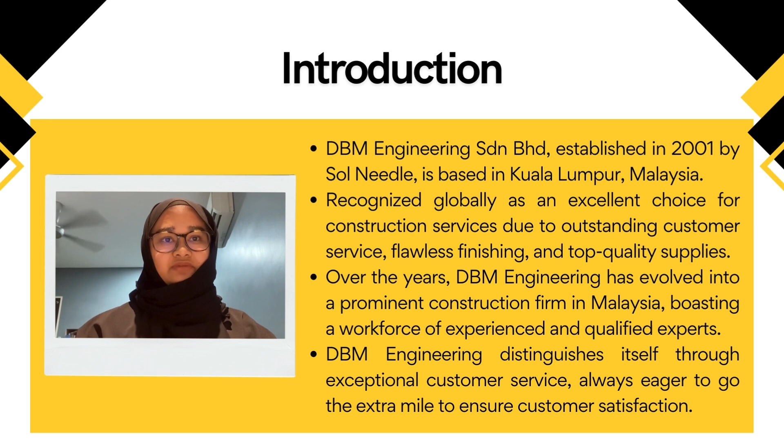It is recognized globally as an excellent choice for construction services due to outstanding customer service, flawless finishing, and top quality supplies. Over the years, DBM Engineering has evolved into a prominent construction firm in Malaysia, boasting a workforce of experienced and qualified experts. DBM Engineering distinguishes itself through exceptional customer service, and they are always eager to go the extra mile to ensure customer satisfaction.

Assalamualaikum. Let's talk about the purpose and importance of company Hirarc. The purpose is first and foremost to prioritize occupational safety and health in the company.

Therefore, accidents or injury prone situations could be avoided. Next, to ensure the company and workers are aware of the guidelines of occupational safety and health in the company. Lastly, to ensure the environment at the workplace is safe and organized.

The importance of this purpose is firstly to identify all detailed risky hazards at the workplace that could harm others. Secondly, to consider the chance of one facing the circumstance of any case, and the possibilities that could occur from the risk.

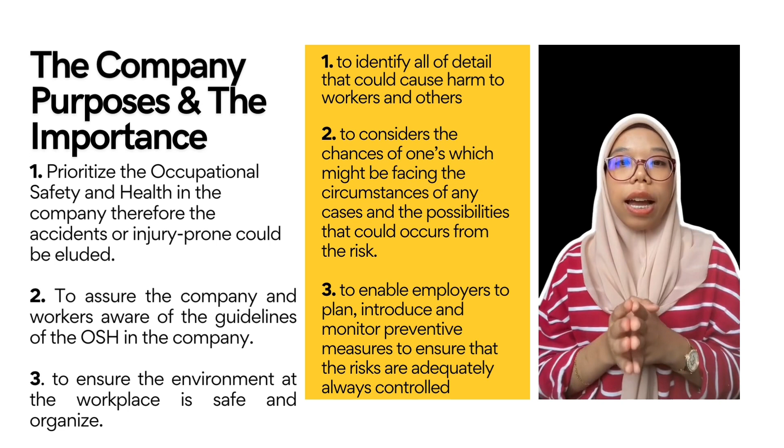Moreover, it is to enable employers to plan, introduce and monitor preventive measures to ensure the risks are adequately controlled. Assessment is conducted by Mr. Arif and his colleagues.

Regarding the construction field, this relates to Sungai Besi-Ulu Kelang Elevated Expressway, SUKE. He complies with every safety and health officer's assignment, which is to run the responsibility by listing down the planning and conduct for certain situations.

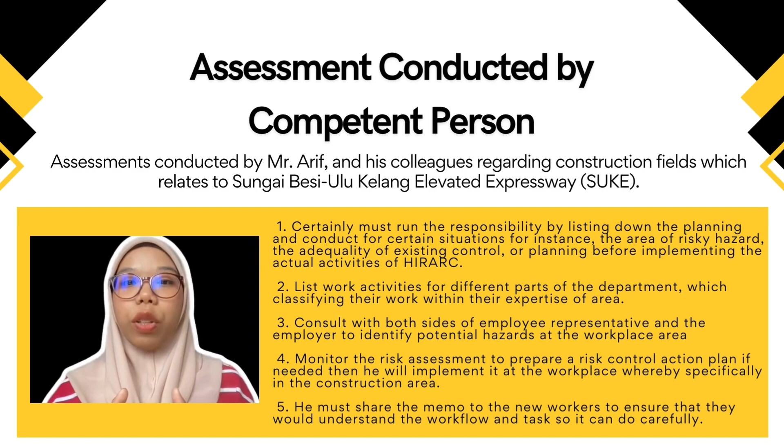For instance, the area of risky hazard, and the adequacy of existing control or planning before implementing the actual activities of Hirarc, hazard elements for each working situation.

A workplace hazard is any activity that can potentially cause harm or damage in a work setting. It includes physical dangers like machinery and uneven surfaces, as well as chemical exposures, ergonomic issues, and psychosocial factors. Identifying and addressing these hazards is crucial for ensuring workplace safety and preventing harm to people or the environment.

This content discusses various occupational hazards and risks associated with different construction activities. It identifies excavation work, concrete construction, and welding as three major risky activities on construction sites.

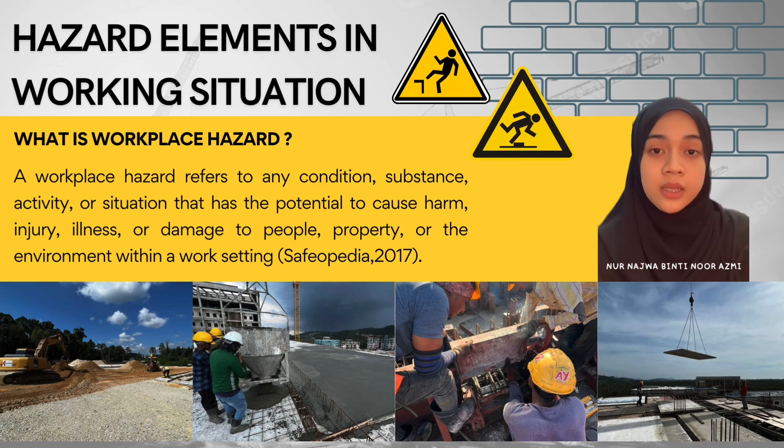Excavation work poses risks of falling materials, collapse of nearby structures, and damage to underground utilities. Concrete construction involves hazards from heavy materials, equipment from finishing work, and exposure to cement dust. Welding brings risks of burns, respiratory issues from fumes, noise, and electrical hazards.

I'll continue with another part, which is risk assessment. Businesses must conduct risk assessment to identify and manage dangers to their operations. Assessment identifies risks and builds processes, controls, and strategies to minimize their influence on the firm's operation.

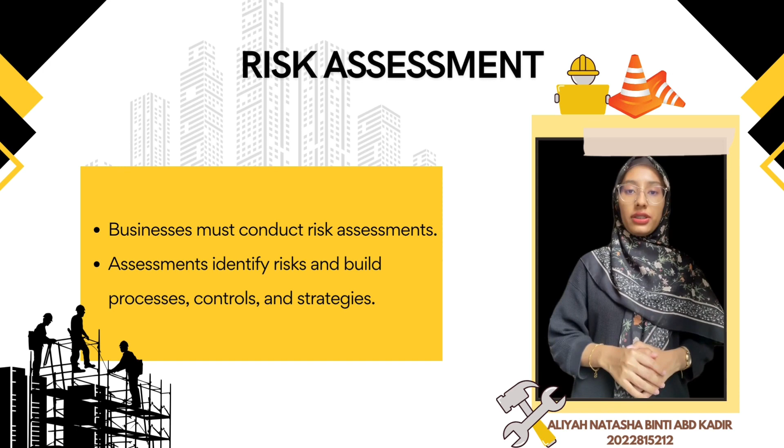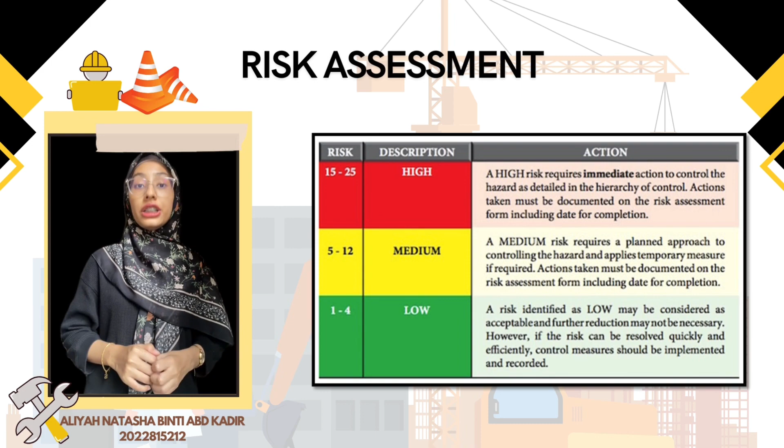This risk matrix is popular because it is effortless to use and meets all risk assessment needs. From this table, we can rank the severity of each potential threat, with high risk requiring a more extreme and urgent reaction. Firstly, the biggest concern is the potential of objects falling from high areas and threatening those working below. This rating is 9 because of the balanced likelihood and severity.

Secondly, when finishing and handling concrete, consider construction site concerns such as chemical exposure. Work with concrete carefully due to dangers. Additionally, welding that exposes workers to strong heat and light offers another hazard. The medium level suggests moderate risk, meaning high temperatures and bright sunshine are concerns.

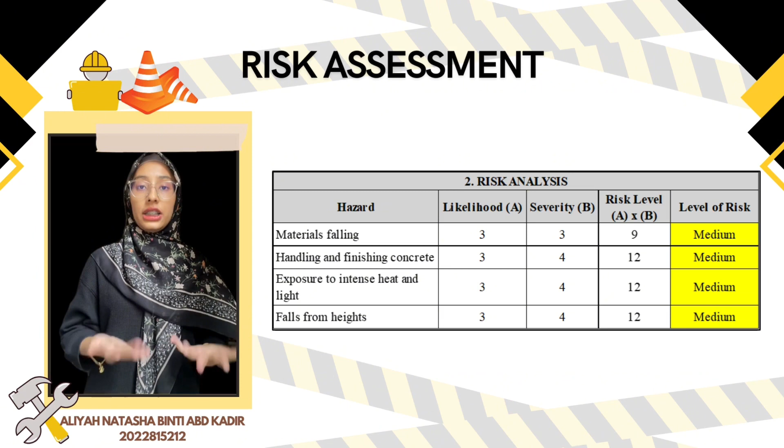Finally, scaffolding and elevated platforms provide a fall risk. Falling from high places is a moderate risk.

The Occupational Safety and Health (OSH) team emphasizes systematic risk control to ensure employee safety by identifying, evaluating, and mitigating workplace hazards. In various construction activities like post-tensioning works, risk control methods include personal protective equipment (PPE) use and engineering controls like isolating workers from hazards.

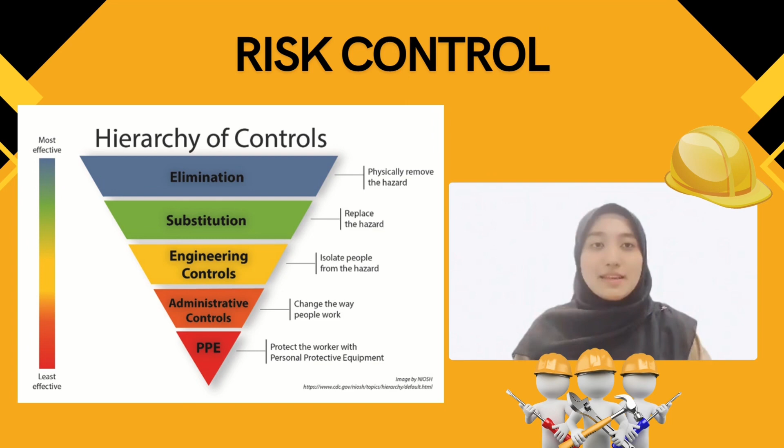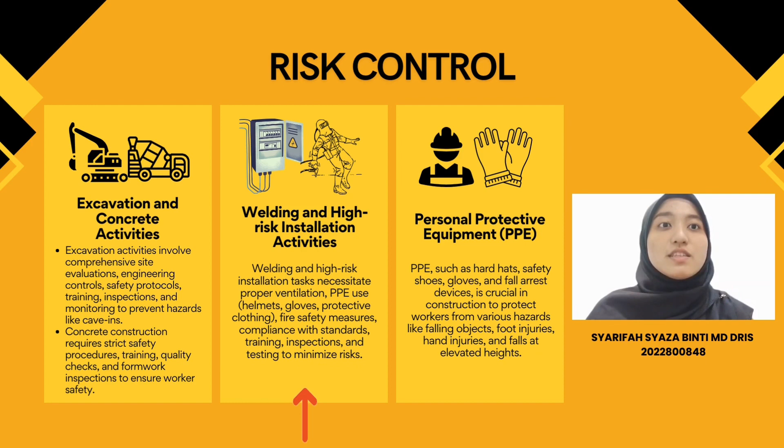Welding and high-risk installation tasks need proper ventilation, PPE use such as helmets, gloves, protective clothing, fire safety measures, compliance with standards, training, inspection, and testing to minimize risk.

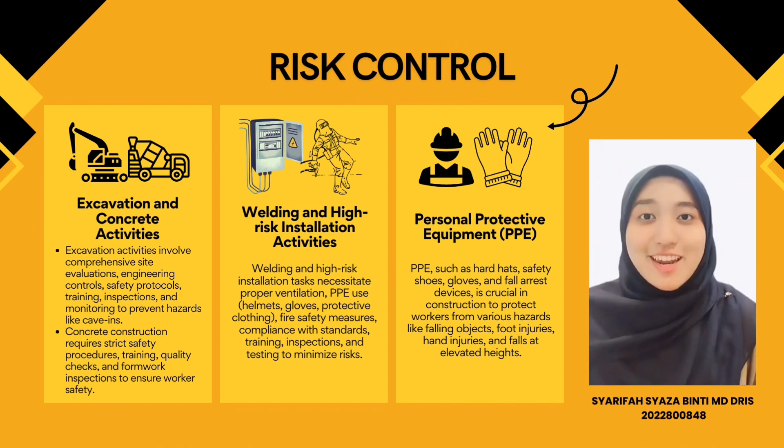PPE such as hard hats, safety shoes, gloves, and fall arrest devices is crucial in construction to protect workers from various hazards like falling objects, foot injuries, hand injuries, and falls at elevated heights.

And the last part is conclusion. DBM Engineering SDN BHD employs hazard identification, risk assessment, and risk control, which is HIRARC, as a systematic approach to enhance worker safety and mitigate risks in building projects.

The company utilizes risk assessment techniques to identify potential hazards, including those related to work safety, job site safety, and work quality, ranging from electrocution to electrical flaws.

DBM Engineering actively implements risk control measures such as ensuring proper personal protective equipment, redefining site layout for floors, and assessing the safety performance of contractors.

The systematic HIRARC approach integrates into regular business processes, reflects the company's commitment to worker safety, and its continued review ensures a secure and healthy workplace while supporting regulatory compliance.